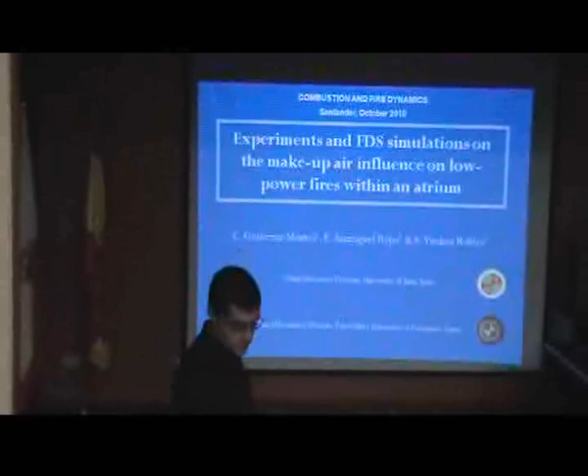So, here we go. I will present the results on the makeup air influence in low power fires within an atrium, which has been conducted by researchers of the University of Jaén together with the Universidad Politécnica de Cartagena. Fire and smoke control and detection are quite difficult tasks within atria, basically because they highly decrease the effectiveness of automatic sprinklers and smoke detectors, and the lack of floor-to-floor separation allows the fire and smoke to travel large vertical distances, affecting multiple floors at the same time.

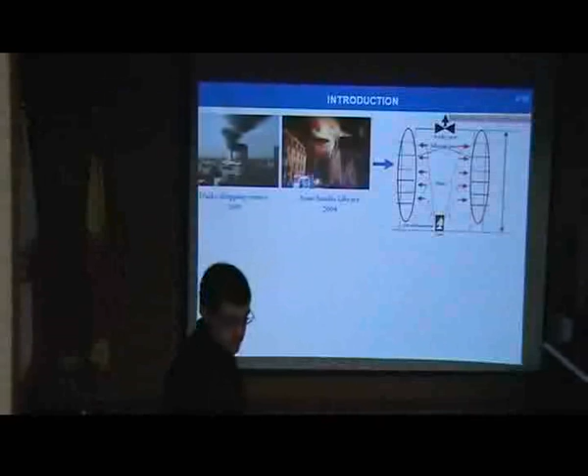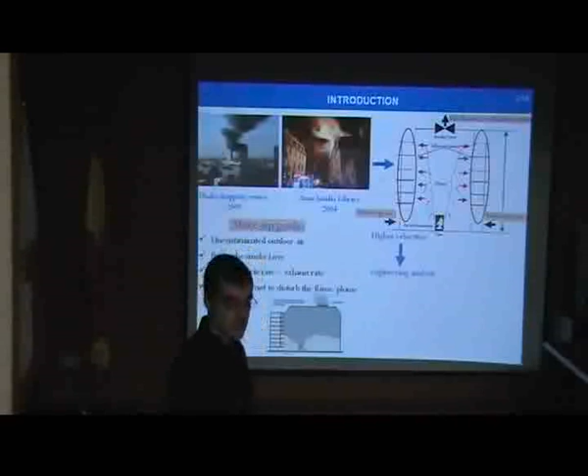At this point, one of the most commonly used systems to control smoke spreading are the mechanical exhaust systems, for which makeup air has to be supplied in order to conserve mass. This makeup air has to fulfill some goals such as uncontaminated outdoor air, to be supplied below the smoke layer, at a volumetric rate lower than the exhaust rate, or, for example, at relatively low velocities, not to disturb the flame or plume. Normally, maximum velocities of 1 meter per second are found in standards and codes. However, these restrictions can be modified if they are supported by engineering analysis. It can be conducted by means of experiments or CFD modeling.

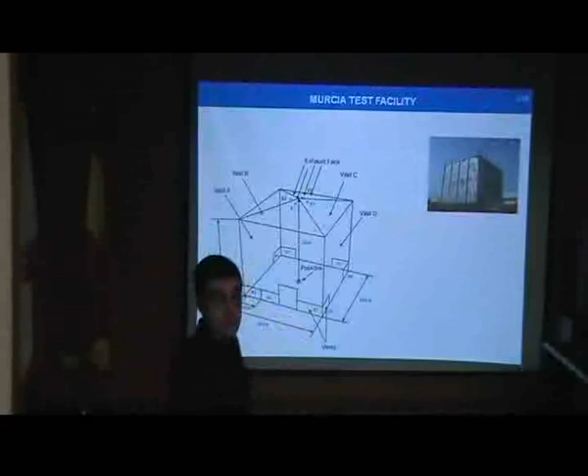These CFD models are widely being used for this kind of engineering analysis, although there is a necessity of conducting more validation studies in order to check the capability of these codes for this kind of analysis. In order to contribute to this necessity, here we're presenting the results from full-scale atrium fire tests, which have been conducted at the atrium fire facility of the Centro Tecnológico del Metal of Murcia. This facility basically consists of a prismatic structure of 20 by 20 by 20 meters, whose walls and roof are made of 6 mm thick steel sheets, the ground of concrete.

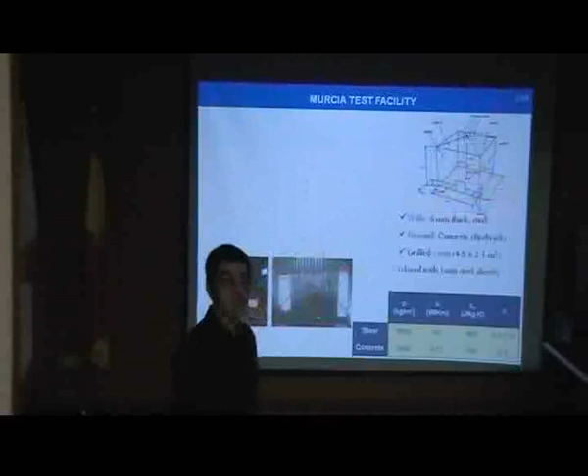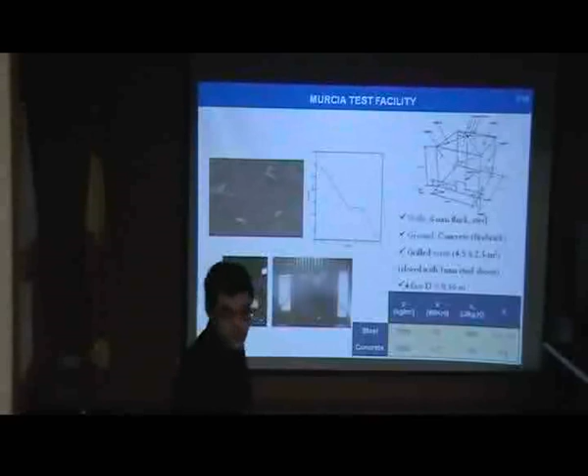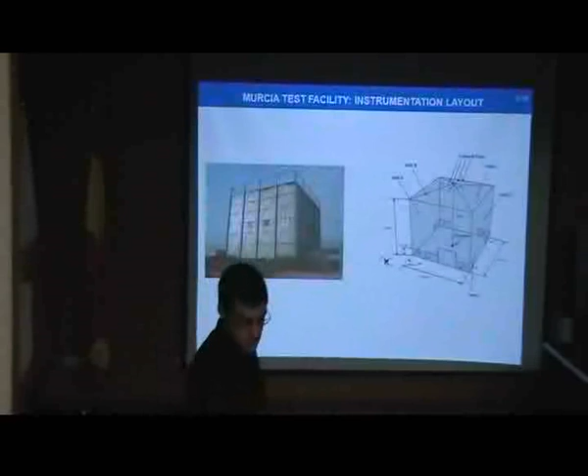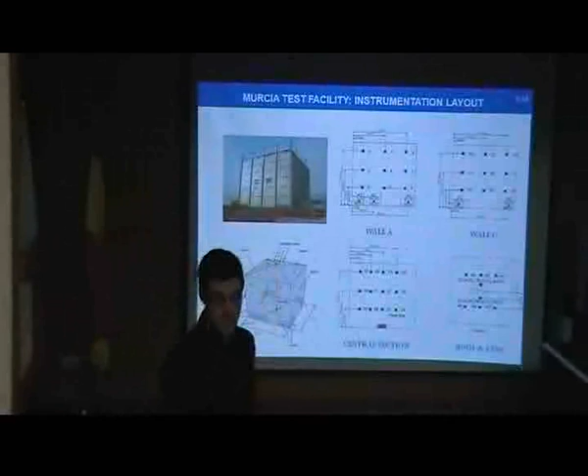This facility contains vents, non-symmetrically arranged at the lower parts of the walls, which can be completely or partially closed. And finally, there are 4 exhaust fans at the roof with a nominal flow rate of 4 cubic meters per second, more or less. In order to register the fire test conditions, up to 61 sensors have been distributed in 4 different regions. Here we can see the main sensors used for this work, mainly in walls A and C, the front and back walls, respectively.

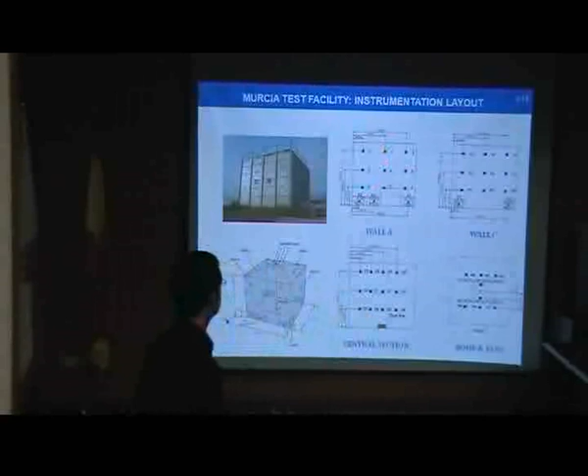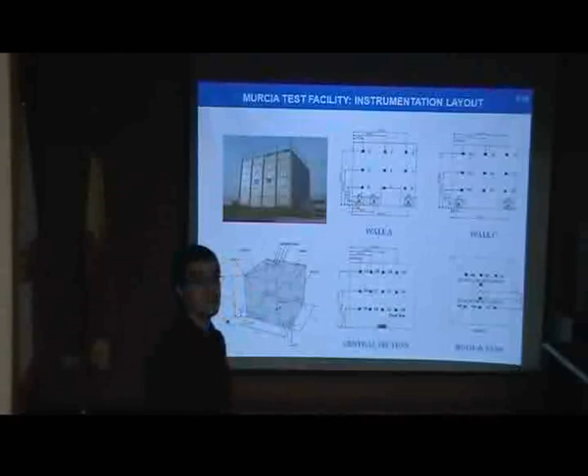The smoke temperature has been measured 30 centimeters inside the facility at 3 different heights, 5, 10 and 15 meters, as well as the makeup air velocity and temperature at the central part of each vent. In addition, the smoke temperature has been also measured in a central vertical section parallel to walls A and C at 3 different heights, 5, 9 and 13 meters respectively, including measurements at the central line.

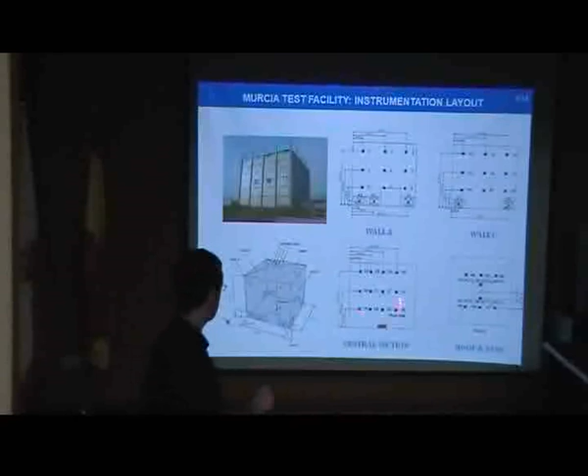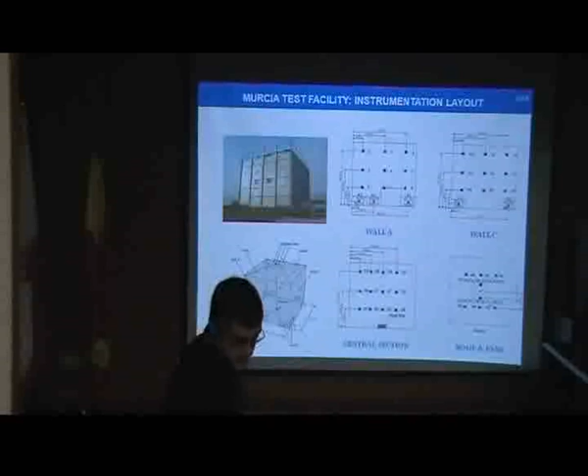And finally, the roof and smoke exhaust temperature of the fans have been also measured. In addition, a digital camera was used to take pictures of the flame, and the meteorological, the weather conditions were also measured.

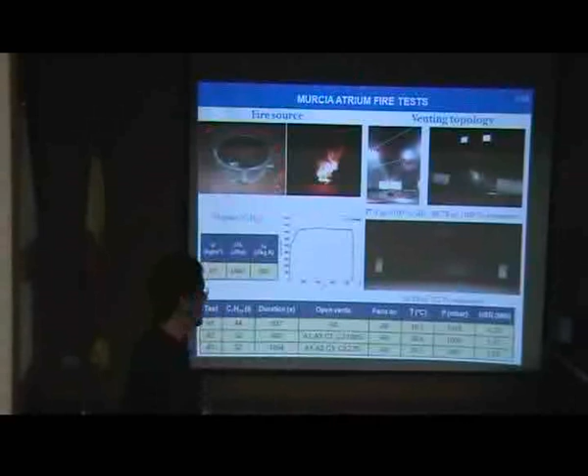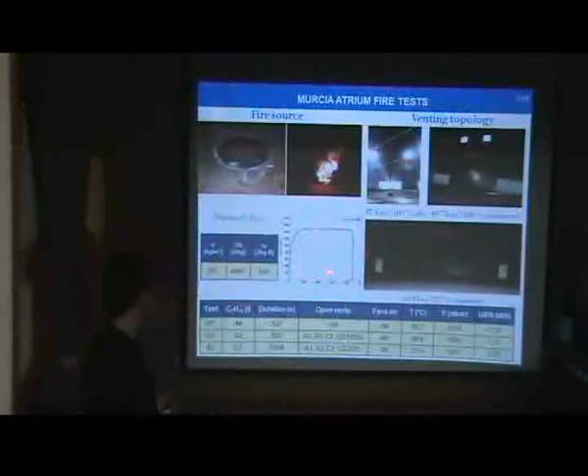Well, here we're presenting results from 3 different tests for which the burning fuel has been always heptane, containing a circular pool fire, 0.92 meters diameter, and placed at the center of the facility. The main properties of heptane, as well as the heat release rate curve as function of time of one of these tests, can be shown below.

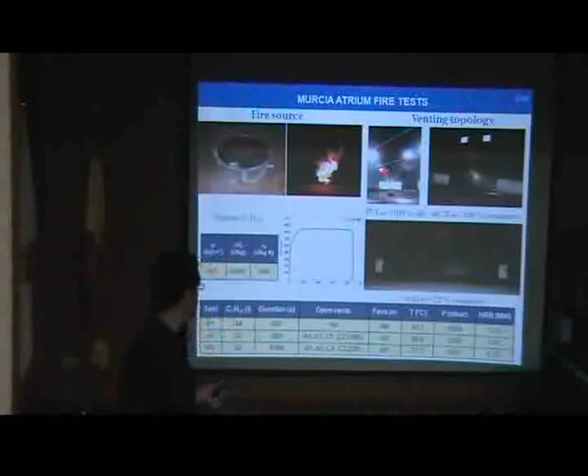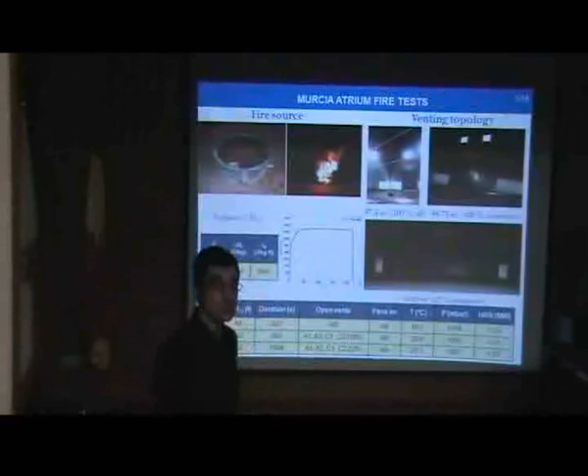Regarding the venting conditions, the fans were activated for all the tests, and regarding the makeup air conditions for the first test, the 8 vents were completely open with a symmetric layout, and total inlet area of 97.5 square meters. For the second test, the vents were completely open but with asymmetric layout. Therefore, only the 2 vents of wall C and the 2 vents closest to the corners of wall A were open.

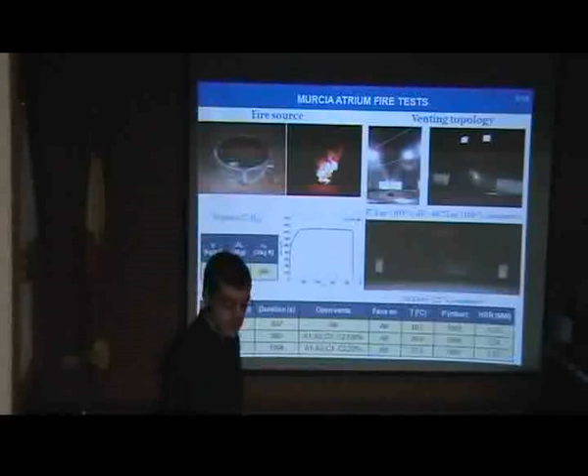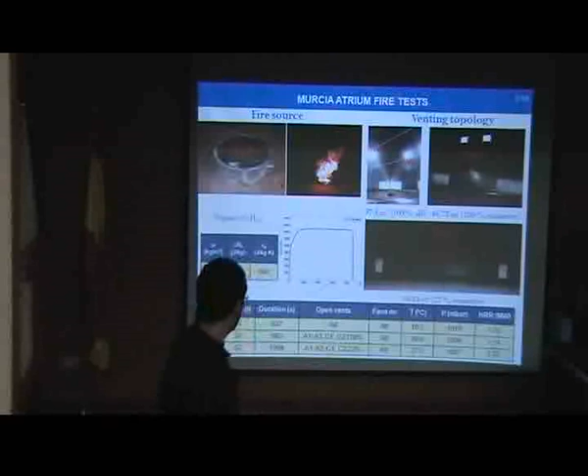And for the third test, the same vents as in the second test were partially open at the 22% of the inlet area, with total inlet area of 10.83 square meters. Summary of the ambient and laboratory conditions of this test is shown in the table below.

Well, once the experiments were conducted, the CFD code FDS version 4 was used to simulate these experiments in order to check its capability to properly predict the fire conditions. It's worth highlighting that the turbulence has been taken into account by means of a large eddy simulation approach. The radiation model implemented in FDS has been used, varying the solid angle between 100 and 300 without any noticeable improvement, and a radiative fraction equal to 0.35 has been set for the heptane.

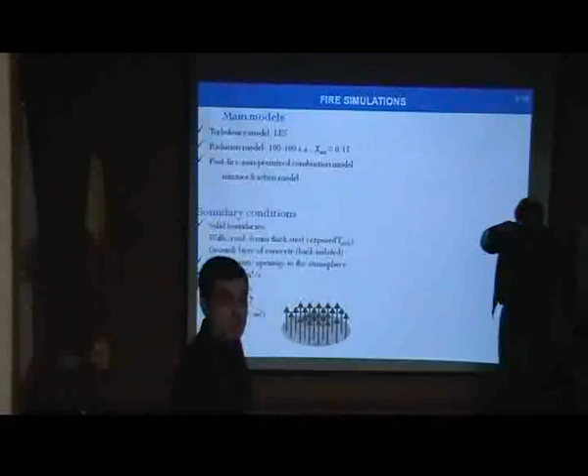And finally, regarding the combustion model, the mixture fraction model is appropriate for a simulation of this kind of turbulent diffusion flames with fast chemistry. Now regarding the boundary conditions, the walls and roof have been modeled as 6mm thick steel sheets externally exposed to a quiet atmosphere at ambient temperature. The ground as an isolated layer of concrete. The vents as open into the atmosphere at ambient pressure, and the fans have been set at their nominal flow rate.

Finally, for the pool fire, the heat release rate curve as function of time obtained in each experiment has been prescribed as an input. Well, before performing the simulations, a grid sensitivity study has been also conducted in 3 different stages. Firstly, a constant heat release rate fire of 1.3 megawatts has been modeled, refining systematically the grid, and comparing the results at the center line and the fans region, finding that the 3 final grids show more or less the same average results.

Secondly, taking into account the spatial resolution needed for a proper large eddy simulation, the minimum number of cells for each fire test have been computed, finding that these 3 final grids are within this range. And finally, a real full-scale fire test conducted in the Murcia Atrium of 1.3 megawatts was also simulated with these 3 grids, finding no differences between the 2 final grids. At the end, the finest grid, in order to assure grid independency, was used.

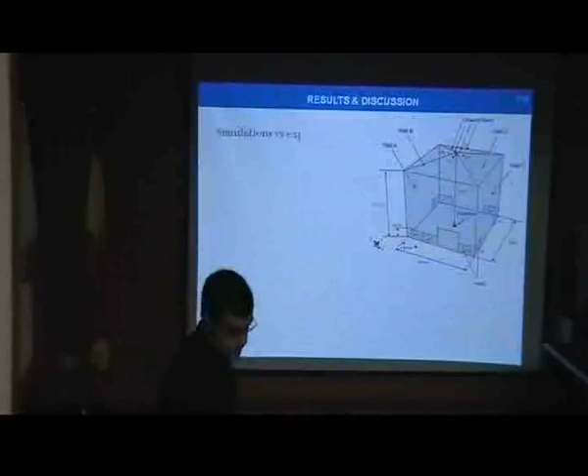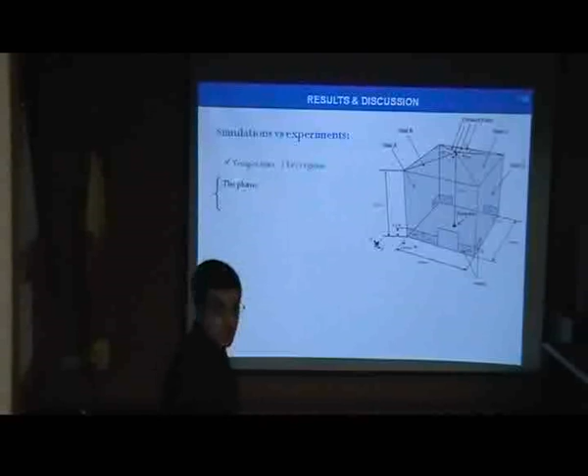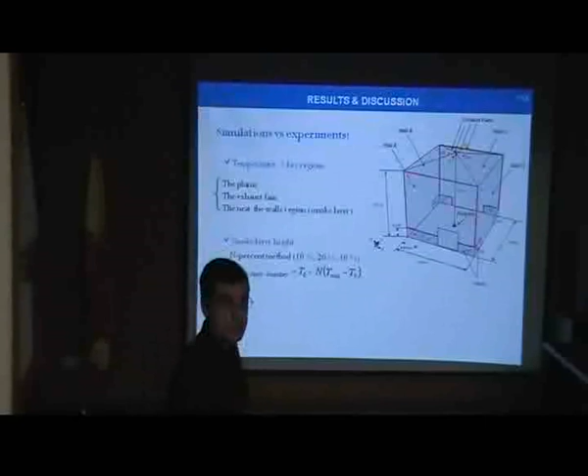Well, once these simulations were conducted, the predictions were compared with the experimental data in 4 different regions. The temperature has been compared at the center line, namely the plume, at the exhaust fans, and the near the walls regions. The smoke layer has been also compared with experiments, which has been taken into account by means of the n% method, and the makeup inlet velocities at the vents were also compared. Well, here we have the results for the first test. Above